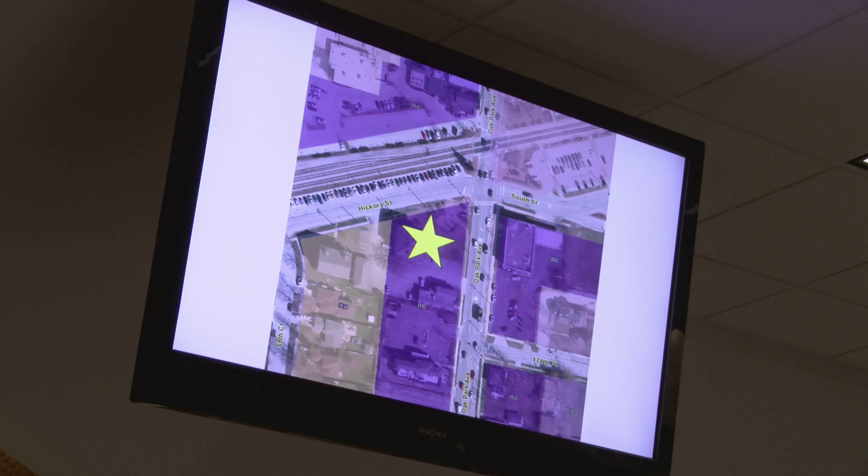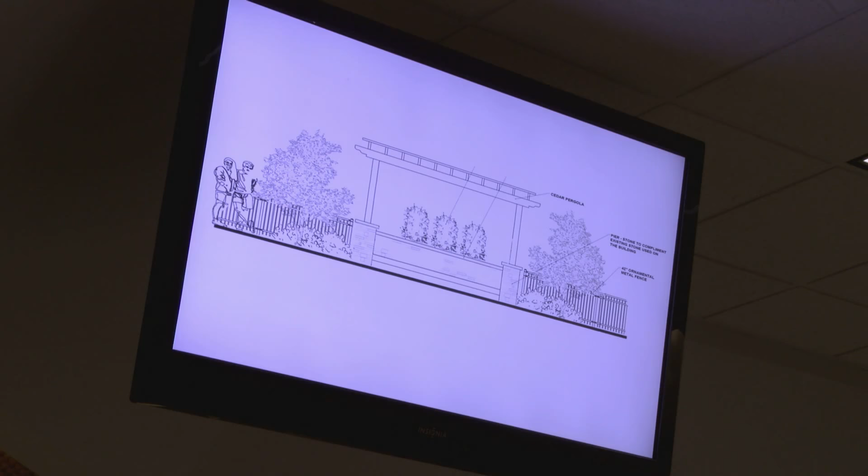Here's the site plan and the proposed pergola. You can see it's about 7 feet from the property line along Oak Park Avenue, that east property line. So a variance is required because the required setback is 20 feet from the space.

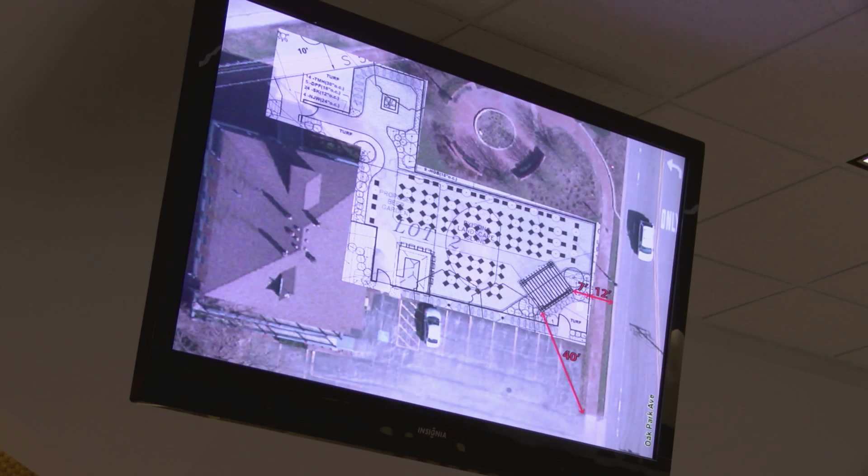These are the measurements that we requested at the last Plan Commission meeting. I also overlaid the site plan on an aerial image sheet to get a better idea of what that will look like approximately, trying to scale it as best as I can, to show what that might look like in relation to the rest of the site around it.

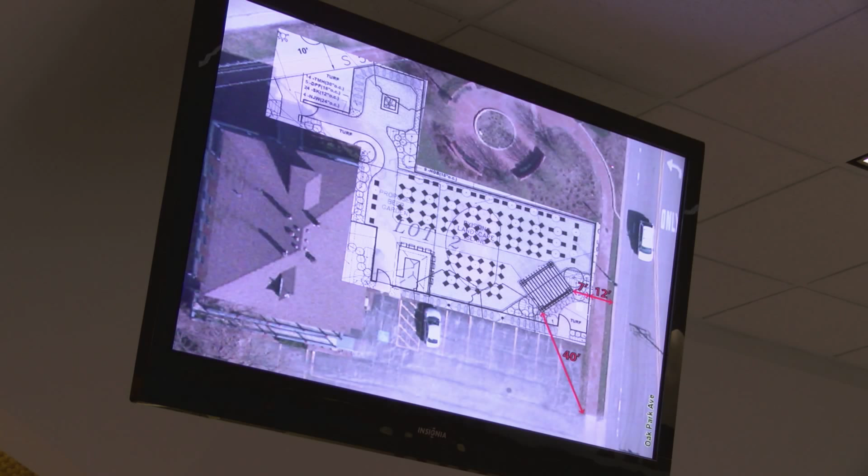You can see you've got the 7 feet between the pergola and the property line, and about 12 feet between the property line and the curb of Oak Park Avenue on the west side of Oak Park Avenue. Additionally, you've got about 40 feet from the south corner of the pergola to the curb cut. So we don't think this will be an issue for line of sight. That's definitely a concern in a lot of cases where we have these front yard setback requests, and I think it was a great question to ask.

This is the proposed plat of subdivision. I used color to show you the division of the lots here. The Banging Gavel property will be lot 2, which is in yellow.

That will be composed of the building and the beer garden area. Lot 3 is the green area, and that's the existing public plaza. And the red is lot 1, and that's all but one of the parking spaces you see in the existing parking lot today. That will become a municipal.

Yes, the yellow lot has 1 parking space for the dwelling unit inside the building, because there is a parking requirement for dwelling units.

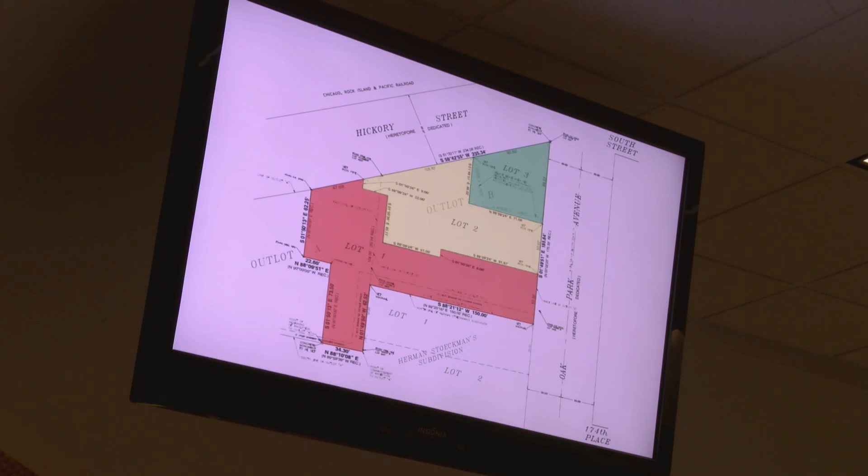Here's the proposed sign. The sign needs a variance for the height, which is 7 feet, where 4 feet is allowed for this particular type of sign, as well as the location is right near the property line, which you can see that red line, and the star is approximately where the proposed sign will go.

We have had some other signs in the Legacy District, both new and existing, that are close to the property line like this. So that's something to think about, as well as the best location for the sign on this property. They are proposing some significant landscaping improvements around the sign and around the site as a whole as part of this beer garden project.

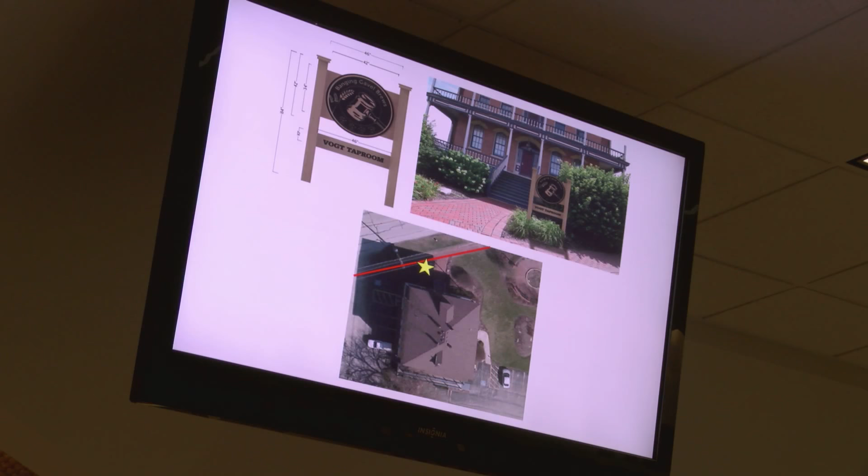And overall, if they were to choose a different type of sign, such as a round monument sign, as found in the Legacy Code, I just want to show you that real quick. That would be sign number 14 in this diagram here from the Legacy Code. They actually would be allowed a larger sign and a height of 8 feet if they went number 14 rather than number 11 like they're proposing.

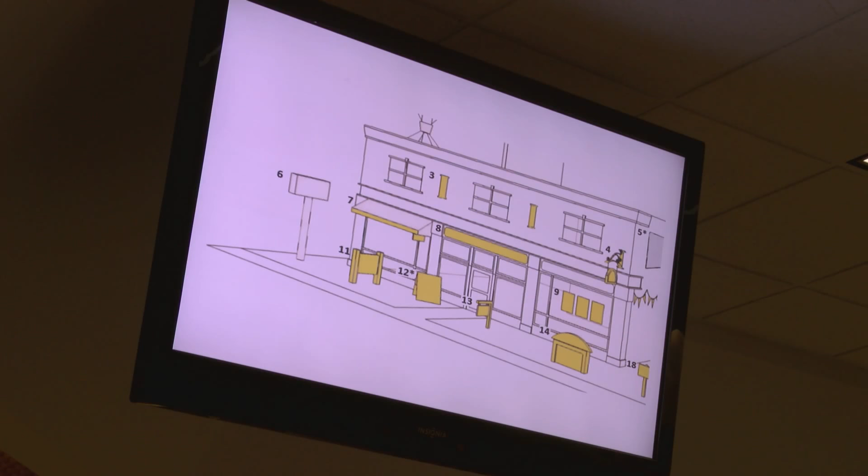So I believe they chose number 11 because it fits with the character of the historic building. It doesn't feel as bulky as number 14. So it's something to consider if we want to have signs like number 11 fit the character of the building, because this would be something that should be considered with the variance. And again, here's that location of the sign shown on the site plan.

Here is the rendering that the petitioner supplied of the outdoor area. This shows the proposed pergola, fencing, seating. You can see the bar area with that little roof. And I believe they also put some of the proposed landscaping in here for you to see what that may look like.

And that's all I have for the staff report. If you'd like me to go over the findings for you, I'd be happy to do so. Otherwise, they're in the report.

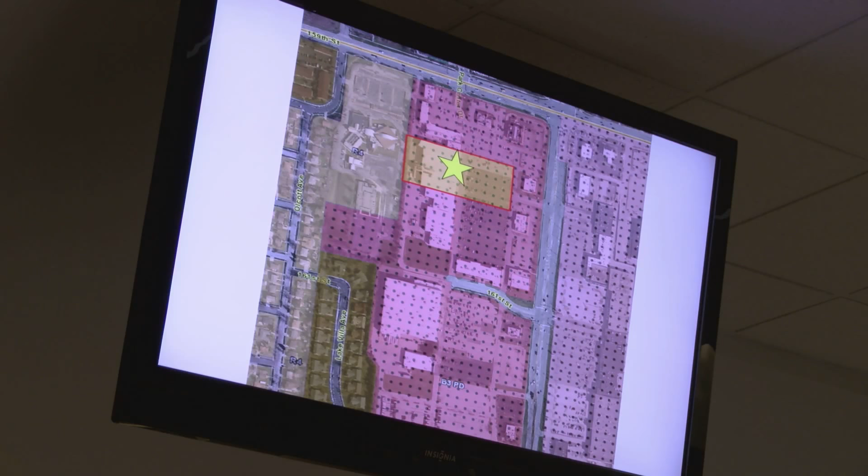To the south, we have more B3 with Sam's Club, the current Aldi store, Steak and Shake, and the former Kmart. To the west, we have a church in the R4 zoning district. We have some R5 or R6 in the darker brown to the southwest. And we have B2 across the street at the Tinley Park Plaza Shopping Center, where you have Walt's, Planet Fitness, Dollar Store, Dollar Tree, and also Starbucks, Blaze Pizza, and Noodles and Company across the street.

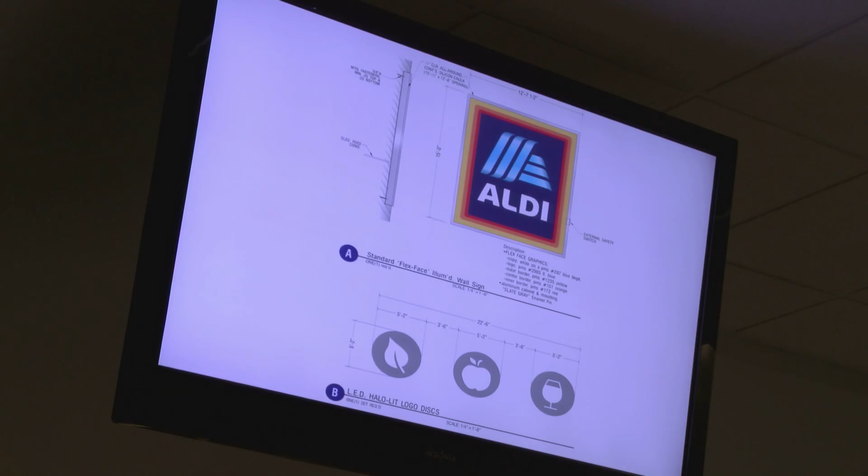Here is the proposed signage again. This is the largest sign, the original proposed sign, and the halo lit discs at the bottom. The petitioner supplied us with these images of lighting to give you an idea of what those discs will look like when illuminated. You can see they'll have a soft glow around them.

In the staff report, we looked at what was allowed by code and what the proposed sign was, and the difference between those. Here you can see they're proposing 4 wall signs, that's 3 more than allowed by code. The maximum square footage allowed is 110. In total they're proposing about 253 square feet, which is about 142 square feet more than what's allowed by code. And the maximum sign height is 7 feet, where their main sign is 15 feet. The discs are about 5'2".

We also wanted to give you a reference showing the Cub Foods sign. Oh, I'm sorry, I didn't talk about the Eurofresh and the Aldi sign here. We wanted to show you a couple of different comparisons for signs around the area. Eurofresh was the previous tenant, they took up the entire tenant space. Now keep in mind, Aldi's only taking a portion of what Eurofresh took up in that tenant space. And Eurofresh had quite a bit of signage, I believe it was actually 500 square feet when I found the permits. Not sure how they got that exactly. We couldn't find a variance or any records of special approval, but certainly they had a large sign on their front facade. We also wanted to compare to the existing Aldi, and I believe that one was similar to the sign they showed, at about 40 or 50 square feet.

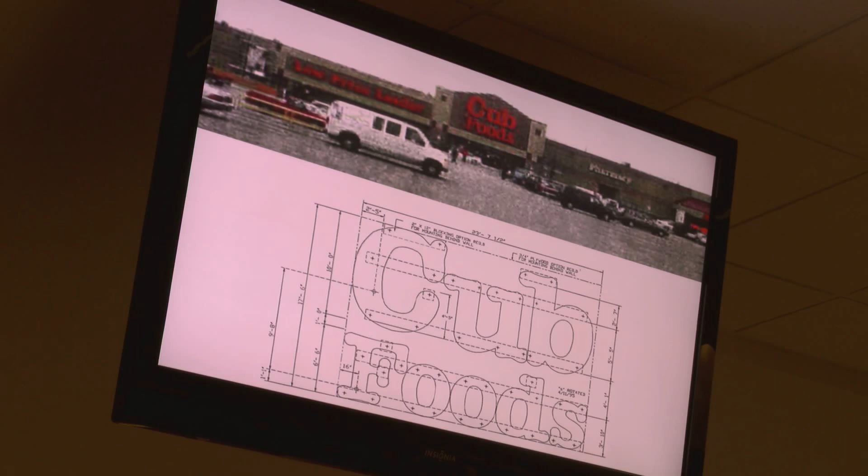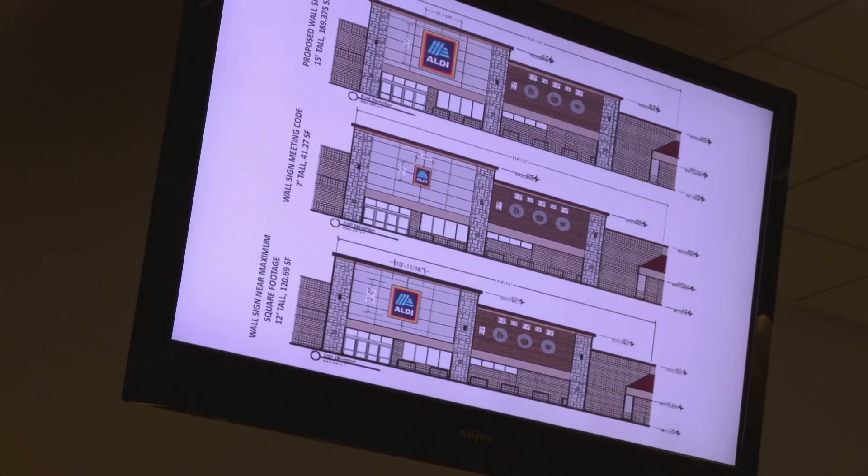Okay, excellent. So Commissioner Corona, did you have more on that point that you wanted to follow up on? Yeah, if we can go back 2 slides to that slide there. How far back from Harlem is that plaza versus where Aldi is currently? Because I think the new Aldi store is going to be, I think last meeting we said it was 87 feet closer to Harlem. Is this plaza similar in distance as the new Aldi store from Harlem?

So I have in my report here that the Planet Fitness is about 320 feet east of Harlem Avenue, and the Planet Fitness is about 220 feet closer to Harlem than the proposed Aldi sign. So they're over 200 feet closer to Harlem overall. The Planet Fitness is? The Planet Fitness is. And from the current Aldi store or the new Aldi store? The new Aldi location.

So like I said, it's over a 200-foot difference how close the Planet Fitness is versus the new Aldi store. Okay.

Just one point of clarification here: the Sam's sign is 100 square feet with 357 feet of storefront, and Aldi is asking for 190 square feet with 114 feet of storefront, correct? Correct, but Sam's Club has a couple other signs on the building as well that we did not include in the calculation. Understood, as does Aldi, to be fair.

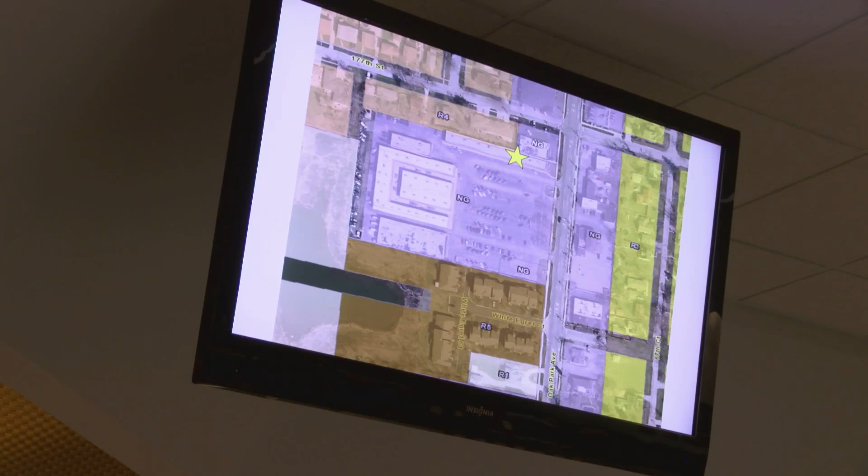And we do have Oak Park Avenue to the east of this particular site. This store does not have frontage necessarily on Oak Park Avenue, but you can see it if you're driving northbound on Oak Park Avenue. And that's really all I have for the workshop.

As far as the sound conditions, I would recommend that we look at the same condition that we proposed for Mile 1 Fitness, that has a 50 decibel limit, with the caveat that if there are any valid complaints about the noise, that we enforce sound safety.

Also, as Commissioner Curran recommended last time around with the bike racks, if we could have possibly the property owner, or in this case the association since we have many property owners here, have them investigate a shared bike rack for many bikes to park. That was something the last petitioner went with, and I think it served the purpose well for all the tenants. That would be something we'd want the petitioner to talk about with the association or the property owner and see what might be viable for bike parking, because we didn't see any other bike parking on the site. And as businesses come and go, they will need to meet that requirement as well.

This is office condo? Primarily, yes. Individual owners of the association? Yes.

Thank you, Stephanie. Down here on the end, Commissioner Engel, do you have any questions? No questions. No questions.

Stephanie, in regards to the sound, how do you justify the bar right there? And then this is going to be right next to the bar, correct? So I wouldn't... I don't know, I mean, I can understand we got to watch the volume, but I'm sure the bar has a lot of carryover also.

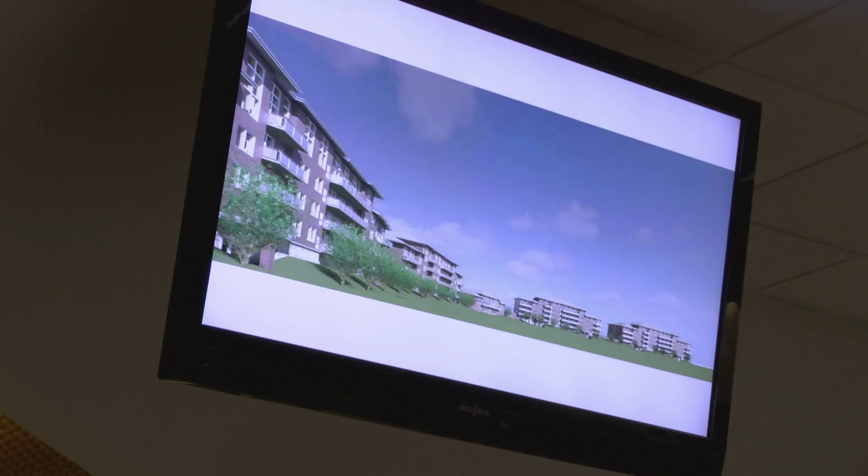And speaking of material samples, we do have those on the table down here if anyone would like to see them. I'm not going to bring them to you because they're about 50 pounds each, and I sadly did not get my workout in by carrying them down here today, but they're rather heavy and you're welcome to come check them out if you would like.

Here's a rendering of the proposed development. You can see they are going with 4 four-story buildings and a clubhouse at the center. And just to let you know, again, the road does sort of curve along here, so these buildings are placed on the curve. This image doesn't show the road actually on here, so I just wanted to make sure you understood that there will be a road going through that sort of green area there.

Previously, the Plan Commission—some of you are still commissioners here today, some of you are new—might be familiar with the first time this project came to us earlier this year. They were originally requesting 2 buildings and a clubhouse, and each building would have 72 dwelling units rather than the 36 per building proposed today.

The site also had several amenities throughout the development, and the petitioner was able to retain all, or almost all, of those amenities in this particular plan. With the last iteration, there were concerns about the bulk and size of the buildings, and the petitioner went through the process but the plans were not approved.

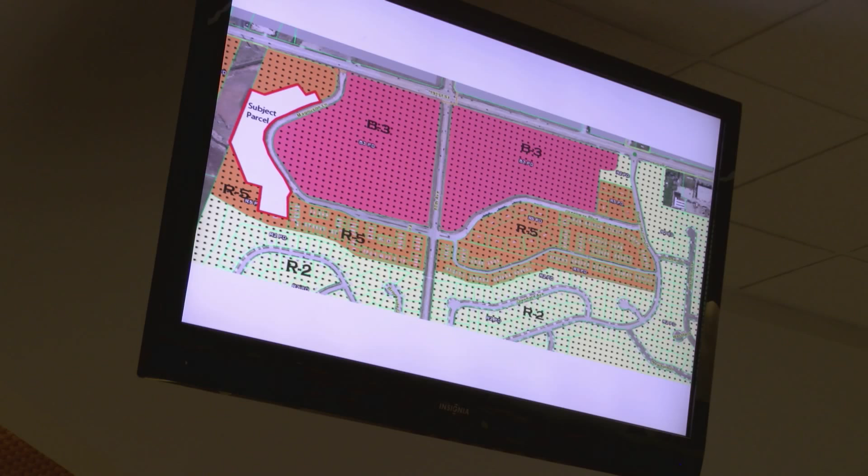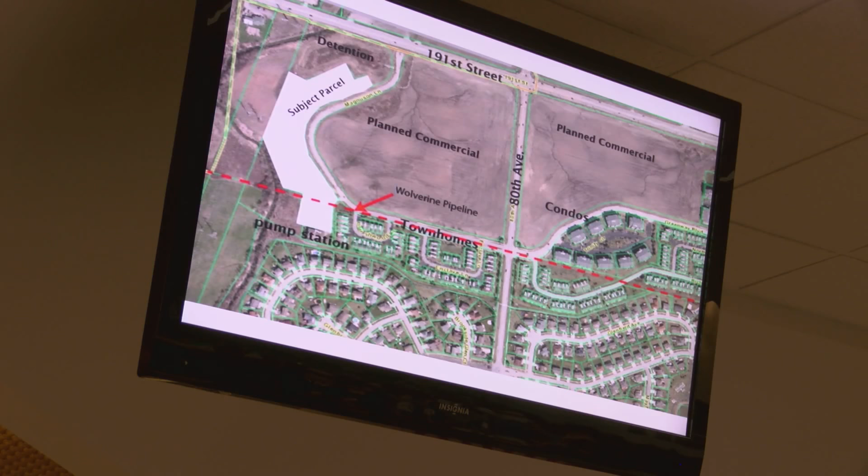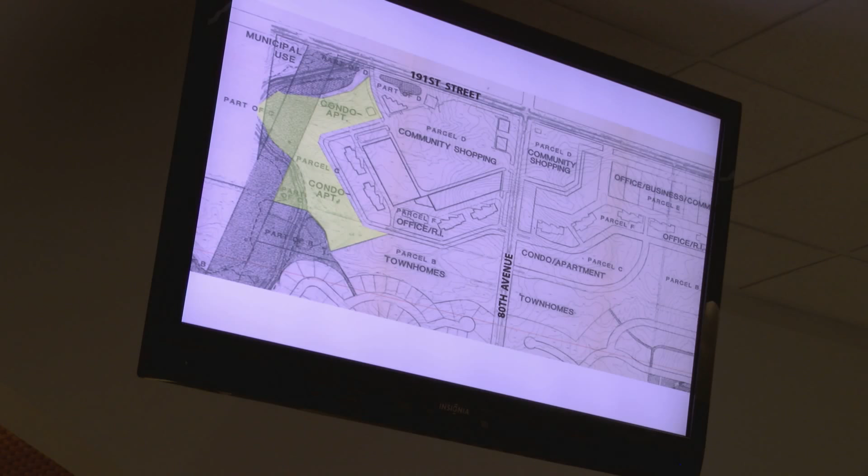So, open item number 1: they are looking for an exception to the front yard setback requirement. There are two regulations at play here—the minimum setback requirement for R6 multifamily structures, and the Urban Design Overlay District, or UD1, which applies to properties south of 179th Street in Tinley Park. This overlay aims for lesser setbacks to promote a pedestrian atmosphere, bringing buildings closer to the street for a more modern look. So we have conflicting regulations: multifamily requires a 25-foot minimum setback, while the overlay calls for a 20-foot maximum. You really can't meet both, so an exception from one is required.

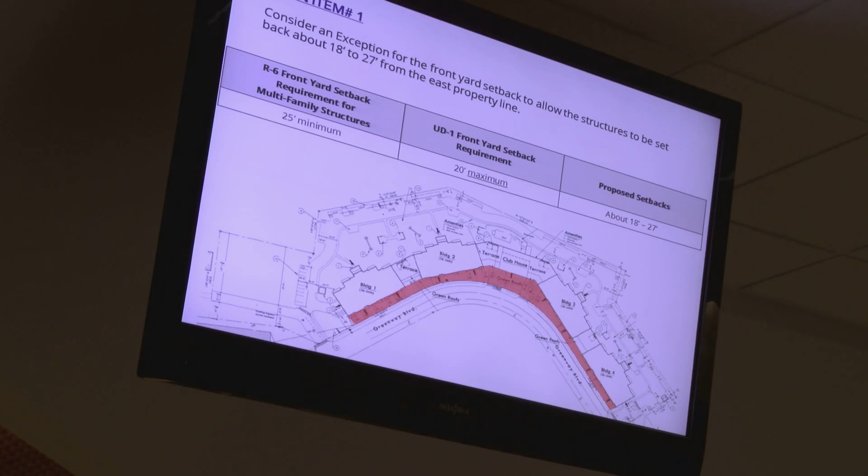What the petitioner did is set the building back between 18 and 27 feet, so it sort of meets the intent of both regulations—some parts of the buildings are less than 20 feet back, while others are farther back than 25 feet. So, as I said in the staff report, they're straddling the regulations by having that range of setbacks.

Open item number 2 was an exception for the building height to allow the structures at a maximum building height of 65 feet. Building height is defined as the mean roof height, not the actual very tip top of the building versus the grade. So I put all of those measurements in this particular table here.

You can see the comparison of this particular project to Brookside Place, the existing condominiums, the difference between the two, and the applicable regulations from both the zoning ordinance and the substantial deviation granted in 2000, which references those Brookside Place condominiums and the potential 9 buildings on this site.

The number of stories is the same. They have 4 stories of residential plus semi-underground parking garage. The mean roof height, in this case, they're proposing just under 65 feet, and Brookside Place is just under 56 feet. Their maximum allowed by the zoning ordinance is 40, and in 2000 they allowed a maximum of 56 feet. Again, this is the mean height, not the very tip top of the roof.

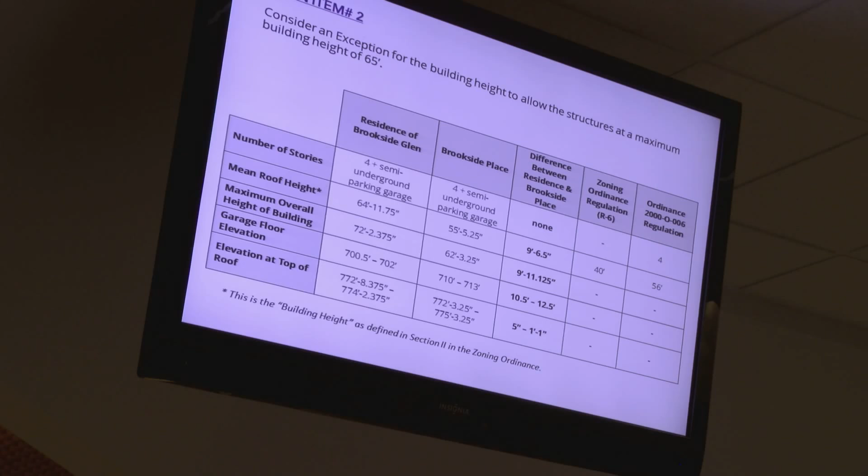That next measurement is actually the maximum overall height, which is just around 72 feet for the proposed project, just about 62 feet for the existing condos, a difference of give or take 10 feet. The garage floor elevation for this particular project is about 700 to 702 feet, whereas Brookside Place is at a little bit higher elevation across the street, across 80th Avenue.

They're at about 710 to 713 based on our GIS measurements, a difference of about 10 feet. So the 10 feet taller that the new buildings are and the 10 feet taller by land are really going to even out when you actually see the buildings along 191st Street or coming over the 80th Avenue Bridge going south on 80th Avenue. It's going to really appear the same because the ground is physically 10 feet lower on this site. That's what that last category is in the table.

It's within about 5 inches to a foot of being the same, so you're really not going to notice a difference when seeing it from afar.

Here's one more comparison we wanted to show you. This is the proposed building, one of the proposed buildings, and one of the existing condo buildings. As you can see, it's a little bit wider, but it's not completely 4 stories — it's 3 stories on the ends and 4 stories in the middle. This gives it a nice architectural look, with some varied roof lines and articulation in the building.

The height in this building is actually probably more of an amenity than something to be concerned about, because the first floor will be 14 feet tall, whereas the first floor in Brookside Place is about 11 feet tall. A typical floor in this building is still a little bit taller, so you get higher ceilings in the units. The top floor, on both the 4th floor and the ends of the 3rd floor, will have 14-foot tall ceilings, whereas the other units in the existing condos have about 8.5 feet.

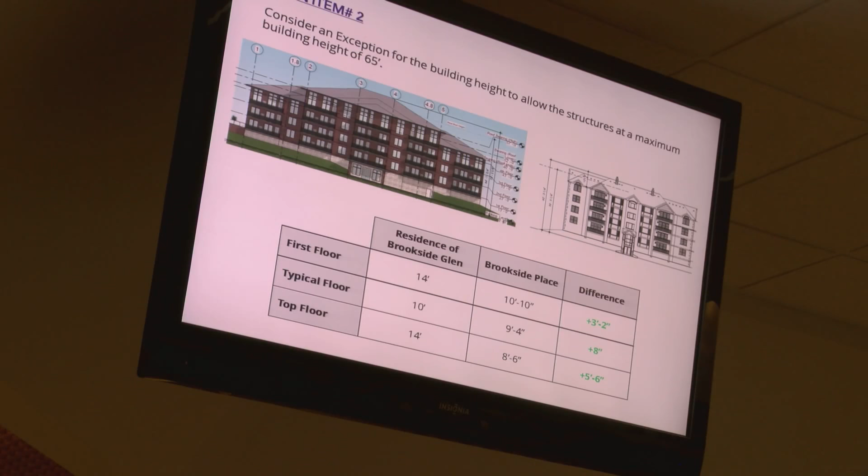So you're going to get considerably taller units on those top levels of these proposed buildings, which works as a nice amenity. That's something to consider for this exception for the building height. If they did not get the exception and had to meet the 56-foot tall requirement like the condos, they wouldn't be able to offer those nice tall windows that look really nice on the building and provide those higher ceiling heights.

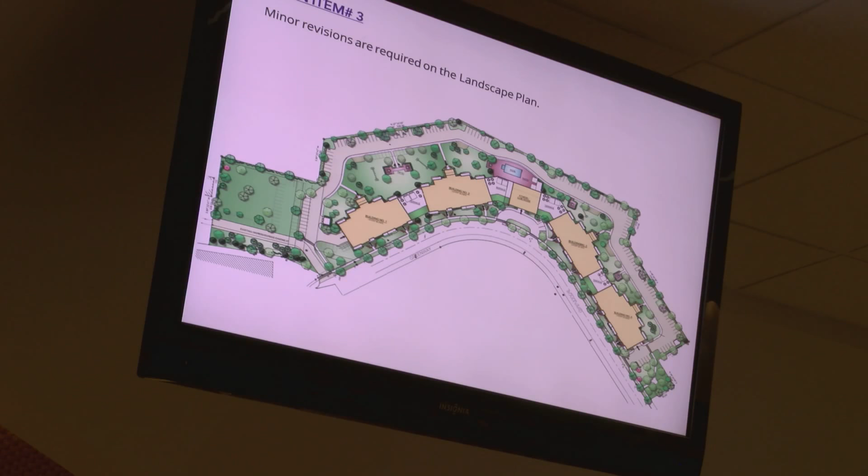Open item number 3, we have some minor revisions required on the landscape plan. The petitioner did talk to me about this and they are willing to meet the requirements of the landscape code. We want to see some additional shrubs and plants. The landscape architect said more groupings rather than linear patterns to make it look more natural, relocating some plant material to provide shade in the parking lot and drive aisles, and removing mulch-only areas because we want to see mulch with plants rather than just a bed of mulch.

Additionally, we want to see some plans for the landscaping on the front part of the terrace. As you can see in this diagram, the first 10 or 20 feet of the terrace will be green roof, so you won't really see the activity on the terrace from Greenway Boulevard or Magnuson Lane in the front because there will be greenery in front of it. Also, the terrace is elevated, above the garage, so we'll see that in the renderings here.

The parking breakdown: the garage spaces have 171, the exterior spaces 125, and they have 64 land-banked spaces, which I highlighted in red shade on this diagram underneath here. That's a total of 360 parking spaces overall. This meets the requirement of 2.5 parking spaces per dwelling unit, so they were able to provide all the parking.

The land bank spaces means that they will not build those parking spaces unless they are needed. So any of those areas shown in red would not be constructed until such time as the village and the developer determine that those spaces are needed, if they have extra residents that need parking or they have guests and they're running low. Overall, the land banking is an asset because it won't be developed and they'll get to keep that green space if they don't truly need all that parking.

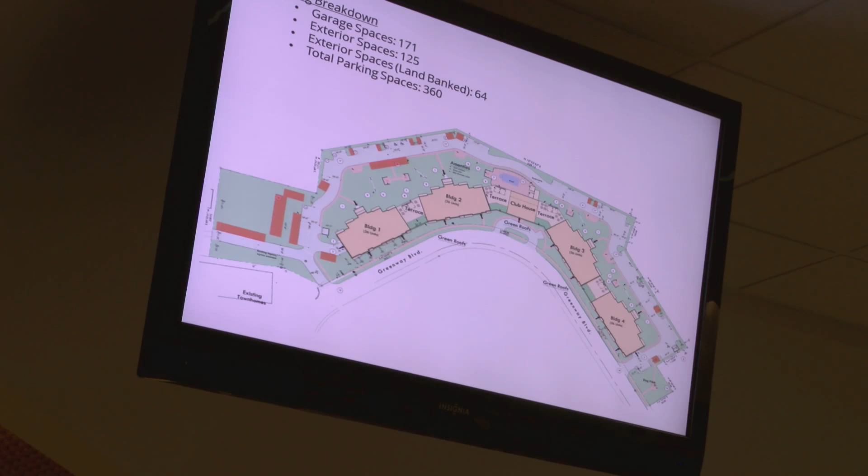I wanted to point out here, these are where the trash enclosures are located. The buildings have their own interior trash rooms, and a property maintenance person will be responsible for taking out the trash from the trash rooms to the actual outdoor enclosures on trash days. They also will have masonry enclosures with gates as well, so it won't just be a dumpster sitting there. It will have an enclosure that matches the building.

We know last time around there was concern with the proximity of the building to the existing townhome. Also in the last proposal, there was a time when the outdoor terrace area was the closest feature to the existing townhome. They made sure there's not an outdoor activity space closest to the townhomes now, and they have almost 200 feet between the proposed structure and the nearest existing townhome. That drive aisle is much the same as what you see today for the existing pump house access, and they'll be paving that, making sure the pump house retains access through this drive aisle as well.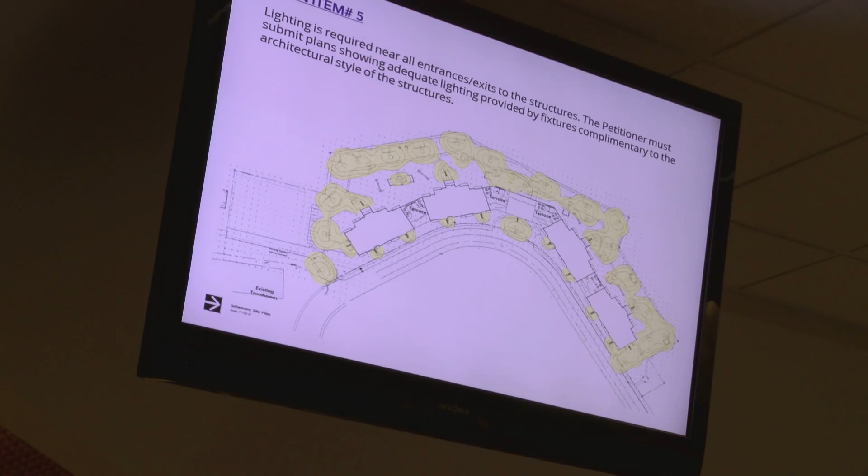Open item number 5 was lighting required at all entrances and exits. We also want to make sure that the light fixtures are complementary to the architecture. This was in your staff report, and they've already provided us a new photometric plan, and I highlighted the areas where the light shows on the plan here. You can see they added some fixtures near all those doors, and I believe there's some ornamental lighting around the terrace areas as well.

We talked earlier a little bit about the amenities, and I wanted to go through some of the conceptual images that they provided showing the amenities. There will be fire pits, as you can see in the image here, out in the west lawn areas between the buildings and the parking lot. And then there will be a pergola and seating area up on the terrace.

Just to go through these amenities: there will be semi-underground parking, a 5,320 square foot clubhouse with a fitness center, locker rooms, billiard room, lounge, office, party room, and free Wi-Fi for residents. There will be an outdoor pool with cabanas, a fire pit, and various seating areas. Outdoor terraces with grilling stations and a sink, so they're running plumbing out there as well. Seating areas, fireplace and fire pits, pergola, and green roofs. Outdoor gaming areas, bike storage, electric car charging stations, disc golf baskets throughout the site, outdoor exercise circuits, fireplace and fire pits with pergolas, open space, and a dog park.

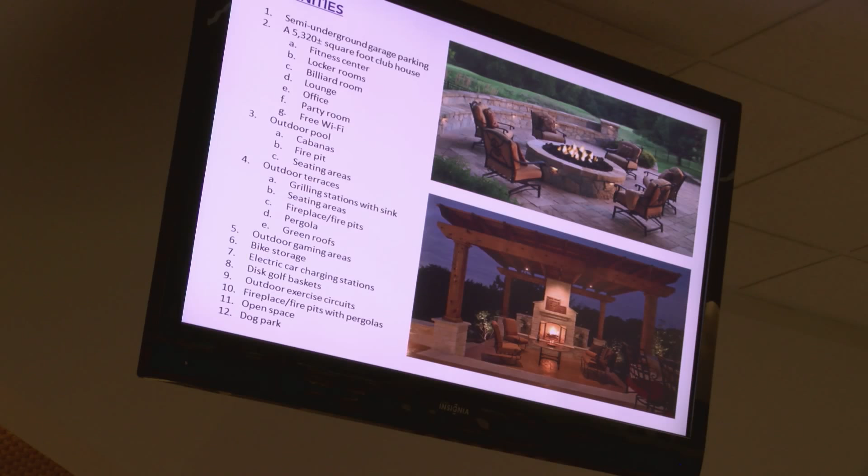On our next page here I've got a couple images for you - here are the bike parking and what the electric car charging stations might look like. They actually moved the dog park from the south end of the site nearest the townhomes and the pump station to the north end of the site, closer toward 191st Street. It's a bit smaller space, but I think they reduced the idea of what they had for the dog park to more of a fenced-in open area rather than all the bells and whistles they had before with ramps and tethers to jump through and those fun things. And you can see here some other places - the clubhouse, the pool, cabanas, locker rooms, fitness room, lounge.

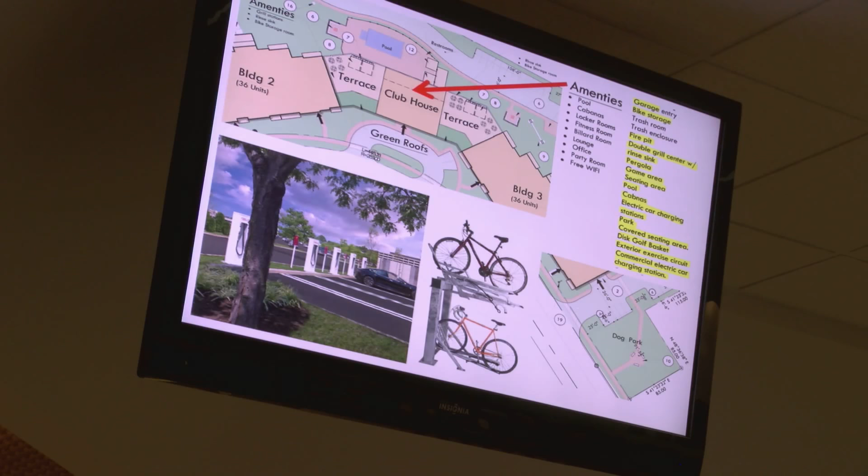All those are in that vicinity with the red arrow pointing to it. And the terrace areas, again between the different buildings, have seating areas and grilling stations, those types of things, as well as green roofs in the front. So again, you're not going to really see that activity on the terrace from the street side to the east of the buildings. So again, the dog park went from that side to that side - it's a little bit smaller, but we wanted to make sure that was clarified here.

And here are some elevations of the building. So here's where you can start to see the different architecture. You have the taller windows on the 4th floor and then on the ends of the 3rd floor, which is a new feature that was not in the last plans. It was only on the top floor that they had those tall windows, but in this case since they were able to break that up, they were able to add those windows on the 3rd floor as well.

You can see they're also using the brick materials in the darker red color, and on the foundation of the building where you see the lighter color, that's actually the semi-underground parking garage. You can see in this rendering they bermed up some of the green area around that, so you're really going to see minimal of the foundation area around the parking garage because they're pushing that ground up, similar to the existing condos. If you've been over by Brookside Place, you know you don't really see a whole lot of that garage level, but it is what we call semi-underground.

They do have different doors on both the east and west side to access the building, so you can access it from the street side as well as the back side, which is primarily where the residents will enter. The image on top is the west-facing rendering, and the image on the bottom is the east-facing, or street side, rendering. You can see the terrace off to the side on both images - on the left side for the top one and the right side for the bottom one. So you will see, again, that greenery in the very front of the terrace.

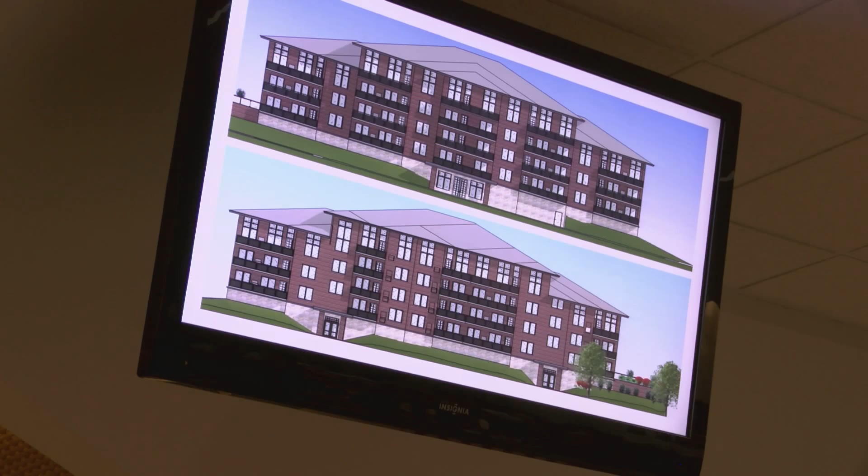And these are the materials - you can see these also on the table in front of you. It's a precast brick where the brick is inset in the concrete panel, and then the foundation material is a stamped concrete slab as well. So the brick is embedded here into the actual concrete panel.

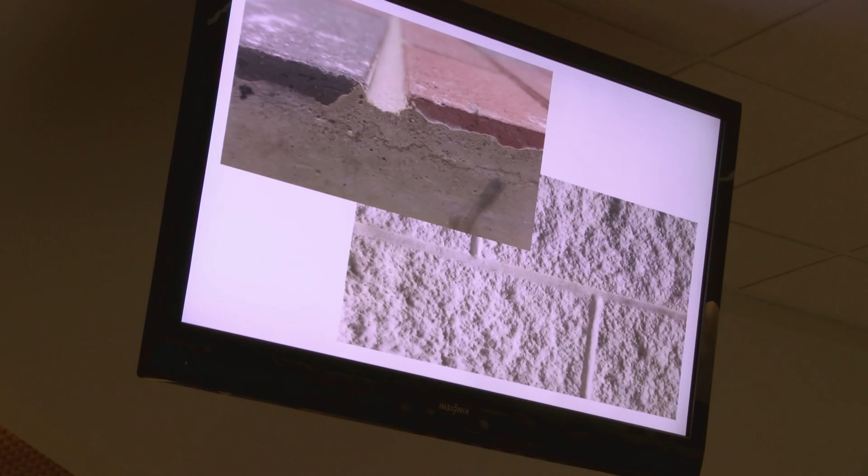Open item number 6 was revised elevations to include the reddish-brown brick accents on the clubhouse, because the original rendering showed this sort of beige-colored brick, and we've got both samples here if you're curious to see what those look like. We wanted to make sure the clubhouse matched the rest of the buildings a little bit better and incorporated at least some of the red-colored brick.

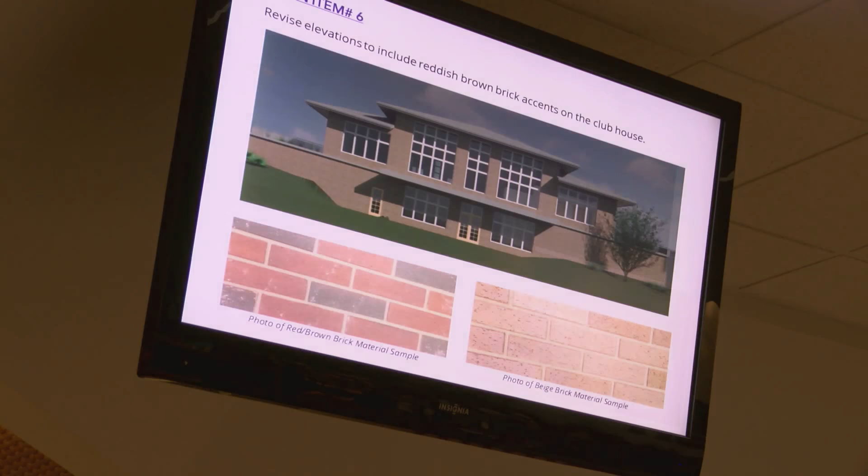The petitioner has already revised the renderings you see in front of you to include the red brick. I think the top image reads a little off because it's not actually going to be striped, it's going to be all red. So I included the bottom one so you can see that more clearly. Since I included this view here, I wanted to include the same view there, so no striped buildings, but we will have more consistency with that darker red brick.

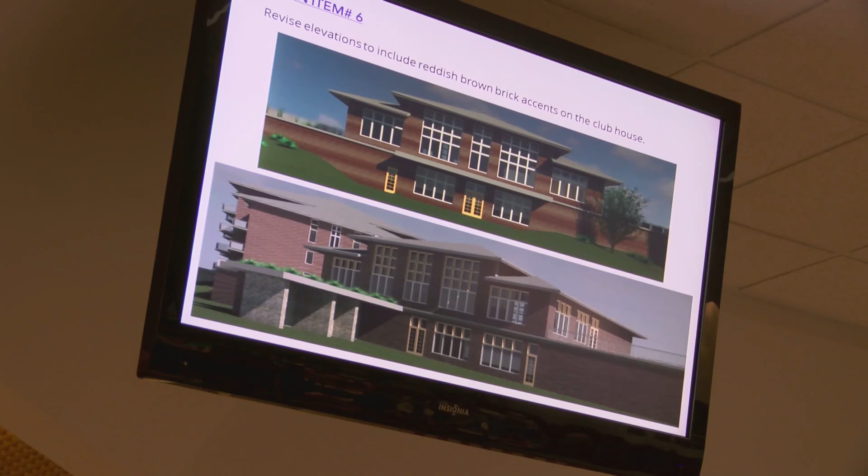I personally like the darker brick because you have the variety with the red and the brownish in there, rather than the beige brick you see here, which is really all one color. So you get a little bit more interest, I think, with the red-brown brick.

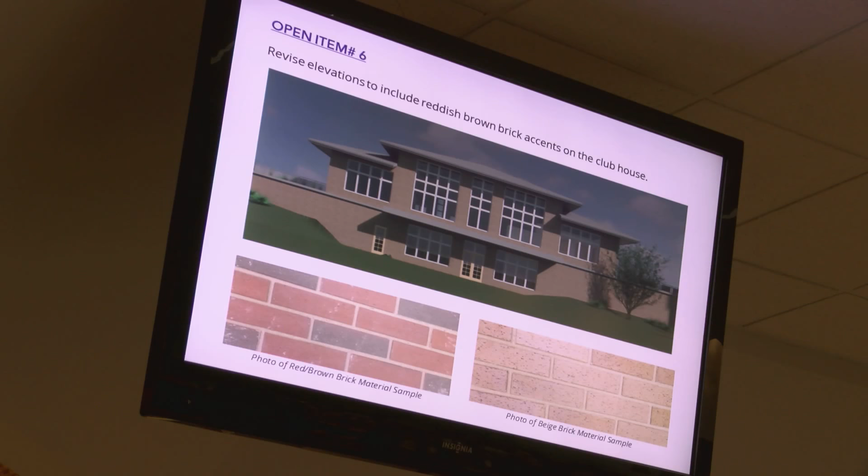The clubhouse did increase about 2,000 square feet or so in this proposal versus the last one. So it's a little bit larger, with lots of amenities inside, and because of increasing the roof height with the architecture here, as well as having the parking go through the bottom of this, the drive aisle for the garage goes through that first floor. They now have a 2-story clubhouse rather than a 1-story clubhouse, so architecturally it matches the scale of those residential buildings a little bit better.

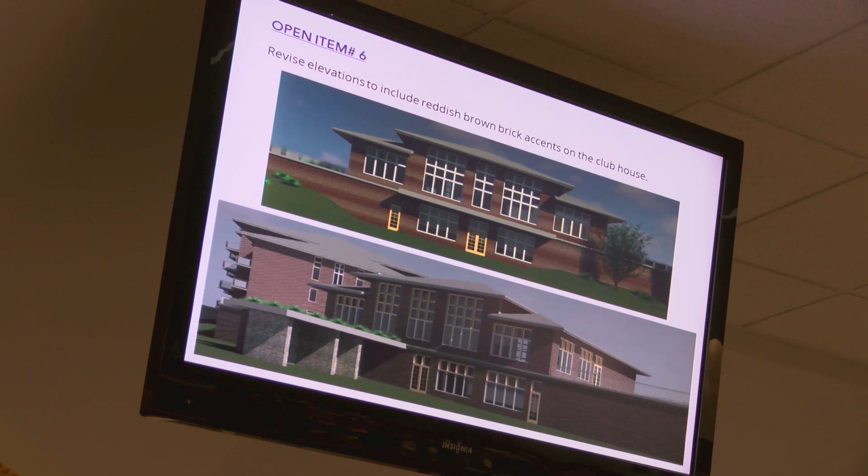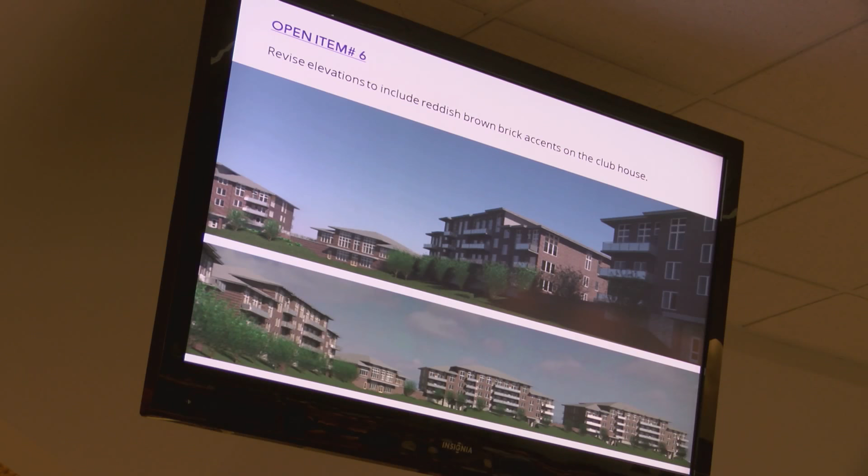Here are some revised elevations that again show that new red brick on the clubhouse. And here's again a good view showing how maybe a 1-story building might not have looked quite as proportional.

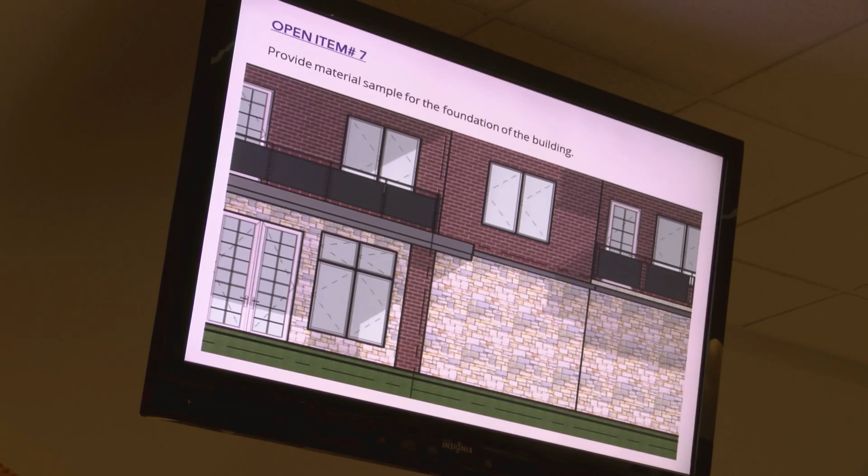The last open item was to provide a material sample for the foundation of the building, and that you have right there in front of you on the table as well. Here are some photos in case the rest of you can't see. Again, it is a stamped concrete, and I'm not sure if it's going to be stained as well. This particular picture makes it look like a couple more colors versus this being one solid color.

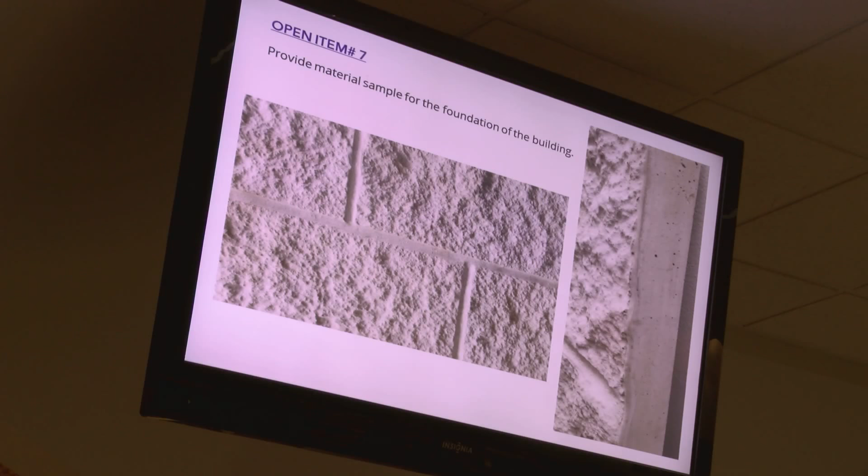Is it going to be stained as well? I don't believe that it is. It's basically going to be covered by all the plantings, so you won't really see it. But it'll be one solid color there, right? Yeah.

One of the last things we talked about in the report was the proposed sign, and we always like to do the analysis on the signs, as we saw earlier today. So we looked at what the requirements were for the sign, and this particular sign package does not exceed the allowable signage for the village, so there's no issues with the sign. We do want to make sure the sign matches the building, so the same materials used on the buildings are used on the sign. That's something that could be formalized later in the process with the sign plan review.

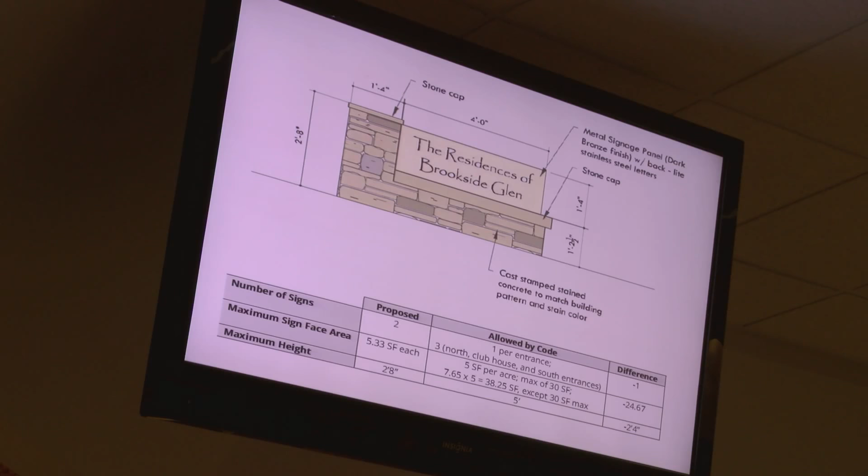No, I think everyone's cognizant of the process, and I think we started a new system here that proved out to be very helpful. We did meet with representatives of Brookside Glen a couple times. We had representatives of the board — Mike Glotz came to those meetings, as well as our liaison for community development, and Mike Mangan. Then the residents themselves held a meeting, last Tuesday, so they were able to ferret out any other issues. Our attorney was there to address some of those concerns, as well as the trustees. So I think we've had some good opportunity to think through and work through some of the issues that were with the first proposal.

And I think that was a nice proposal. Good. Well, thank you very much, Stephanie, for all of that.

Before we move on to the commissioners' questions and the back and forth, before we entered into this workshop, I neglected to recognize that Commissioner Stanton has previously and continues to recuse himself. I won't put him on the spot and make him read a statement, but for the record, he has recused himself from this matter.